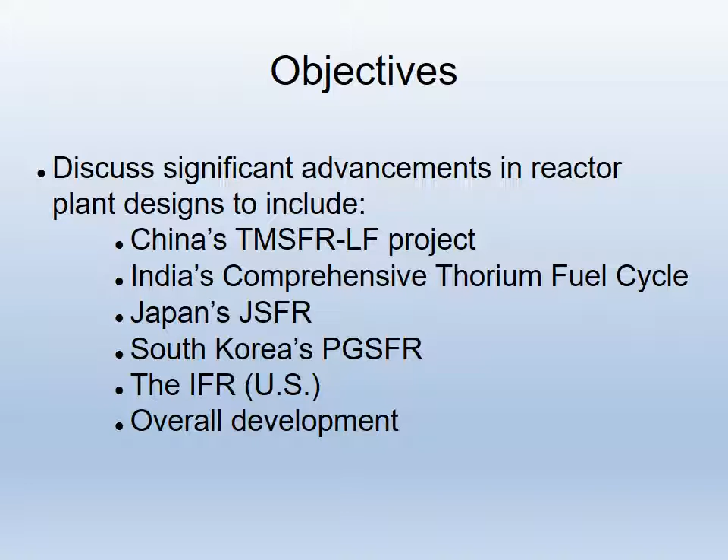Additionally, we will discuss high-level waste concerns, which will include storage, disposal, and vitrification. And finally, we will summarize an outlook on the nuclear power industry in Asia.

The most notable references I have used to develop my capstone project came from the World Nuclear Association and many subordinate web pages, and the International Atomic Energy Agency's Power Reactor Information site. Additionally, my training as a nuclear operator in the United States Navy and the continued education have provided me insight to the nuclear power industry and development of nuclear reactors. There are many more sources that were vital to complete my capstone project and support evidence I discovered.

First, power reactors in Asia. Below is a graph that has been compiled from data from the International Atomic Energy Agency Power Reactor Information System website. Asia currently has 135 operating nuclear reactors throughout the continent. Many of these reactors are light water pressurized water reactors. China and India currently dominate the industry, with China having the significant lead. They take this lead with the number of reactors that have been planned and proposed.

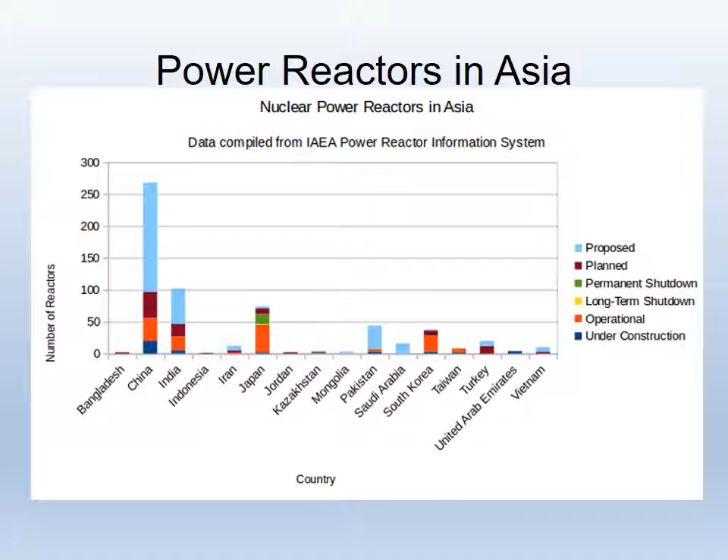The nuclear share. The data below has been provided by the World Nuclear Association, and it has covered the period from 2004 to 2014 of nuclear share production. Nuclear share is a percentage of electrical power production which is derived from nuclear power. Overall, there has been a decrease in nuclear share throughout Asia, and that would be to exclude Japan from this figure. The sharp drop from Japan is due to a shutdown of all plants after the Fukushima incident, and its nuclear share percentage is only incidental of that.

Even though the nuclear share has been declining in Asia, it may not necessarily mean that nuclear power plants are not being constructed. Simply, it means nuclear power plants are not being constructed or contributing to electrical power production at a rate that would counteract the increase in electrical power consumption. Currently, electrical power consumption in developing countries such as China and India is growing more and more every day, and reactor plants cannot be built fast enough at a realistic scale to combat the rising consumption needs of electrical power.

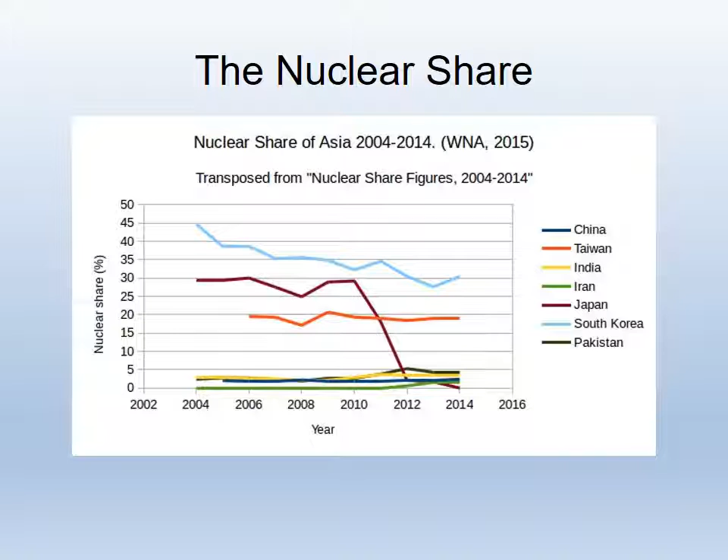Although the nuclear share throughout Asia continues to go down, world electrical power consumption continues to go up, particularly throughout Asia and developing countries. Below is a graph by the Energy Information Administration, which shows predicted power generation rates until the year 2040. The world nuclear share is predicted to slightly go up and slightly plateau by the year 2040. But this does not mean that the building and construction of nuclear plants has been stalled. This is simply because the rate of electrical power production and consumption is going up faster than the nuclear industry is building their share of reactors for electrical power production.

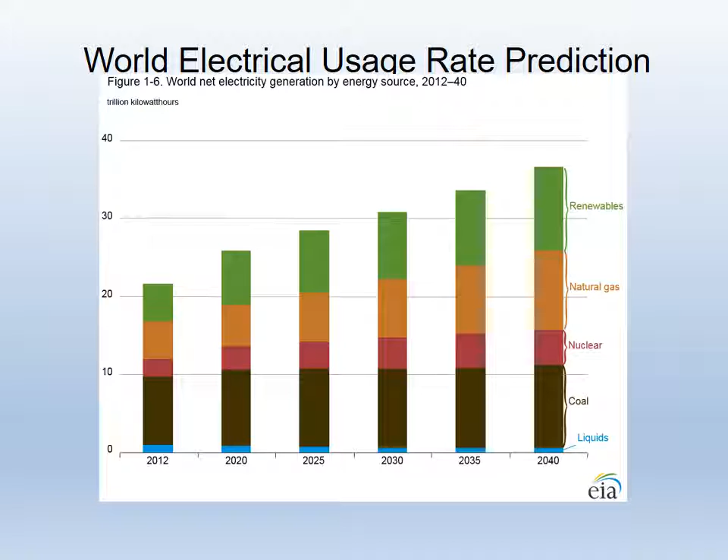Some documents, such as the BP Energy Outlook 2016, have predicted nuclear share rates of Chinese, Japanese, and Korean nuclear power industries to as much as triple by the year 2060. This is a clear indicator that Asian countries have a vested stake in their nuclear power industry over the next several decades and are truly becoming world leaders. Recently, the Japanese nuclear power industry has come to be known and defined by the events of the Fukushima accident.

The Fukushima accident led to the destruction of several reactors and a complete shutdown of the Japanese nuclear power industry. Only several reactors have restarted since the Fukushima accident in Japan, and recovery efforts are still in progress.

China is known to have no incidents above a level 3. The South Korean nuclear power industry has an impeccable record. Recently, the South Korean nuclear power industry had discovered several uncertified parts had been installed in some reactor plants. These reactors were shut down, officials were indicted, and charges were filed against them. No other notable incidents or accidents are known to have occurred in Asia. This excludes Russia.

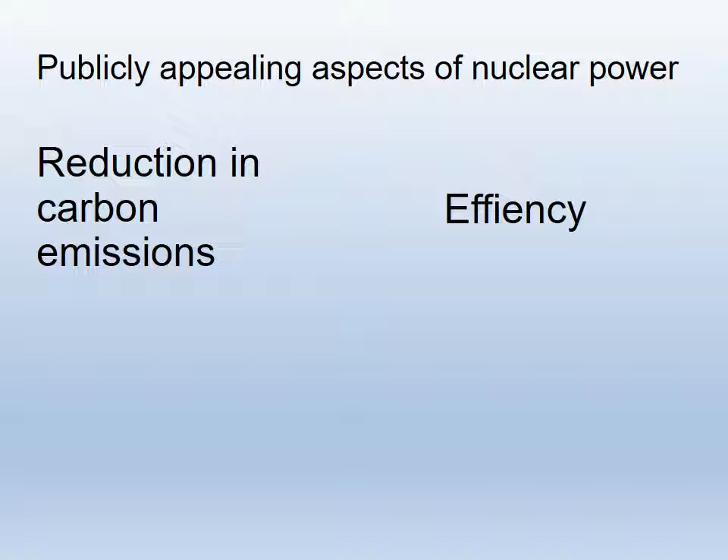Nuclear power has several publicly appealing aspects. However, we will discuss two. The first publicly appealing aspect is reduction in carbon emissions. The second is the efficiency of nuclear power. Reduction in carbon emissions is very appealing to the public due to many political factors and environmental factors, and efficiency stands for itself.

Carbon emissions. According to the World Nuclear Association, nuclear power ranks amongst the lowest of CO2 producing power sources. Nuclear power may even be the lowest ranked CO2 producing power source according to some estimates. Many groups are concerned about carbon emissions due to environmental factors, and many scientific theories support that reduced carbon emissions can improve the environment. These scientific theories have gained much political support and support from the public. Nuclear power provides an alternative to many hydrocarbon power sources, while reducing CO2 production and operating at the same capacity.

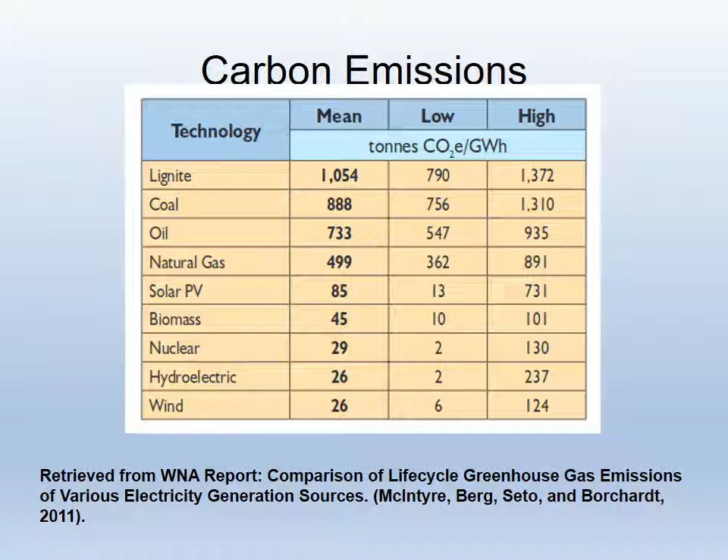Energy return on investment. Energy return on investment is a unique way to give an overall industry evaluation on efficiency based on many factors, such as resources input, capacity factor, initial investment, and many others. According to the World Nuclear Association, nuclear power ranks as the highest electrical power production source as far as energy return on investment is concerned. This means nuclear power is not only efficient in plant design, but economically efficient in many circumstances.

Efficiency can be measured on many scales, but energy return on investment measures the efficiency on a scale of: is it viable? Nuclear power is 10 times more viable than any other power source that you see here when you compare it to the baseline of breaking even. Clearly, nuclear power is a preferred power source if you were to choose a power source to be economically and commercially efficient.

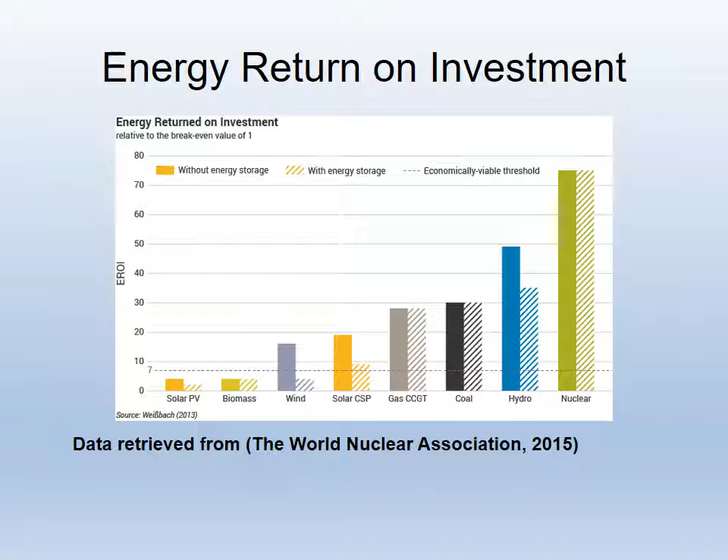Recently, the nuclear power industry has seen many significant advances. In fact, the advances have not stopped. Most of them have been done on paper. However, some countries have put these theoretical plans into action. And some of these are breeding of thorium into a fuel, actinide burning, and molten salt technology.

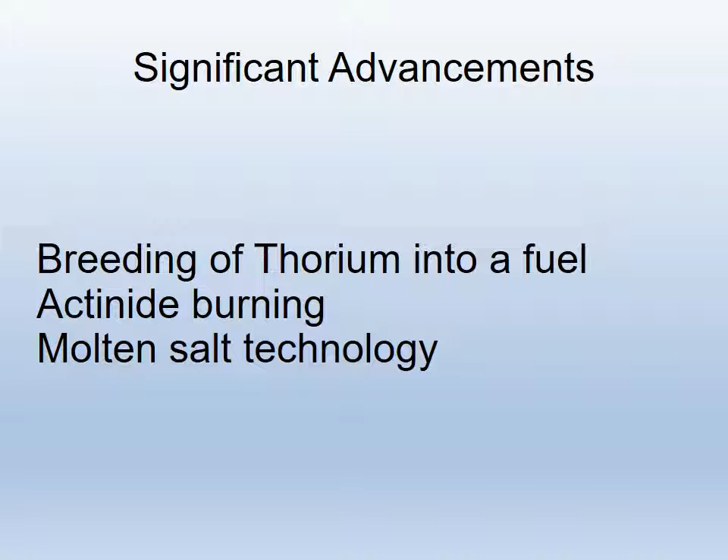Several significant plant designs have been developed throughout Asia due to the desirability of nuclear power: China's liquid-fueled thorium molten salt reactor project, India's comprehensive thorium fuel cycle, Japan's sodium-cooled fast reactor, and South Korea's prototype Generation 4 sodium-cooled fast reactor. Of all these designs, currently none are operational. However, China is near complete in construction of its first thorium molten salt reactor.

This first reactor is to evaluate the use of thorium as a fuel and to evaluate the use of liquid salt as a coolant. The next step in China's thorium molten salt reactor project is to have liquid fuel entrained into salt by being chemically dissolved. This will allow for easy chemical reprocessing of the fuel and continued reactor operations. And the last stage of China's thorium molten salt reactor project is to incorporate a fast neutron spectrum to more efficiently burn actinides and other fission products prior to fuel disposal.

India's comprehensive thorium fuel cycle has also seen advancement in its first stages by producing thorium. This thorium has been produced in pressurized heavy water reactors and is planned to be used for future operations in their entire proposed reactor fleet. India's comprehensive thorium fuel cycle is a large part of responsibility for the proposition of an entire fleet of complementary reactors to develop thorium as their main fuel source.

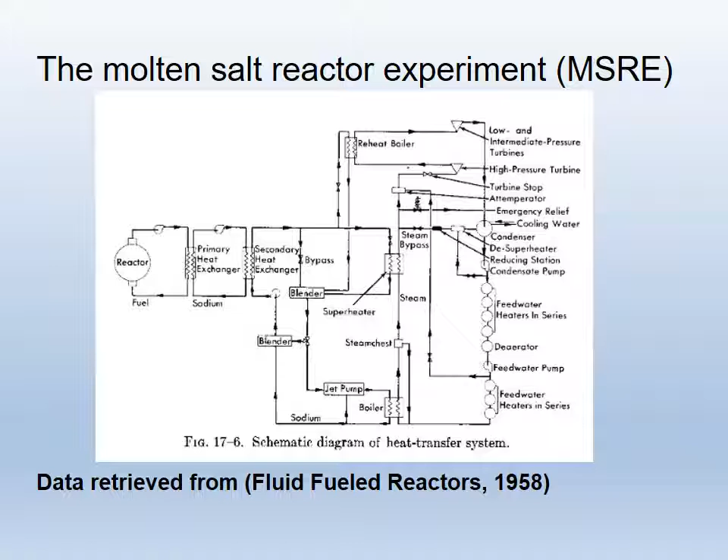The molten salt reactor experiment by the United States was developed to ultimately place a nuclear reactor inside of an aircraft to power it. This reactor was designed to be inherently safe at higher temperatures for better efficiency and lower pressures for a reduction in the number of required safety features. Overall, the molten salt reactor experiment led to a plant which was small, efficient, and safe. Additionally, it provides a fast neutron spectrum which will be beneficial for our next discussion.

This fast neutron spectrum can be very beneficial under correct circumstances. If thorium is used as a fuel and a fast neutron spectrum is maintained, thorium can be bred into uranium-233, essentially turning a non-radioactive and non-fissionable source of material into a fissionable fuel for a reactor plant. This molten salt reactor plant design was proposed by Flibe Energy.

Differences are, the United States molten salt reactor experiment used water in its secondary systems, and the Flibe Energy design of the molten salt reactor plant uses CO2, compressors, and turbines for a supercritical cycle. Additionally, improved safety features such as a drain tank have been installed to this design. This drain tank provides a shaped source for fuel to drain into to ensure no inadvertent criticality can take place.

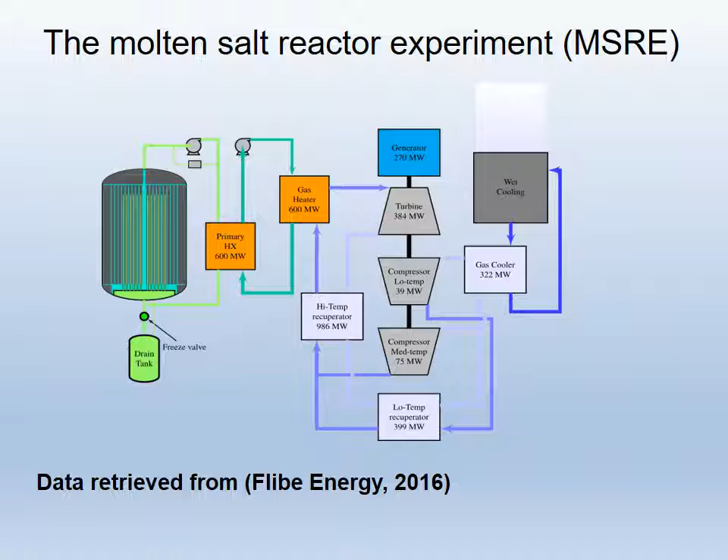Overall, both the molten salt reactor experiment plant design and this reactor plant design by Flibe Energy are the closest indicators of what China's liquid-fueled thorium molten salt reactor plant may look like. This plant provides many advantages over conventional nuclear power plants.

For many decades, nuclear power plants have been producing waste. The majority of this waste is in high-level nuclear waste. This high-level nuclear waste is spent fuel, which contains fission products, and unused radioactive sourced fuel. This fuel is highly radioactive and highly dangerous. It requires the most safe disposal method accomplishable. Currently, fuel is stored on-site in cooling pools at nearly every nuclear site throughout the world and in Asia. This has led to a buildup of nuclear waste.

Currently, the final solution for disposal of nuclear waste is deep underground storage and geological repositories. Waste disposal sites are limited, and when constructed, they must be proven to be impenetrable to groundwater, corrosion, and many other factors to ensure protection of and isolation of the nuclear waste for hundreds of thousands of years. Currently, nuclear waste from conventional reactors will take hundreds of thousands of years to decay. Two factors may make this waste more safe to handle after use: use of fast reactors to burn actinides off, and vitrifying this waste will prevent spread of its effects.

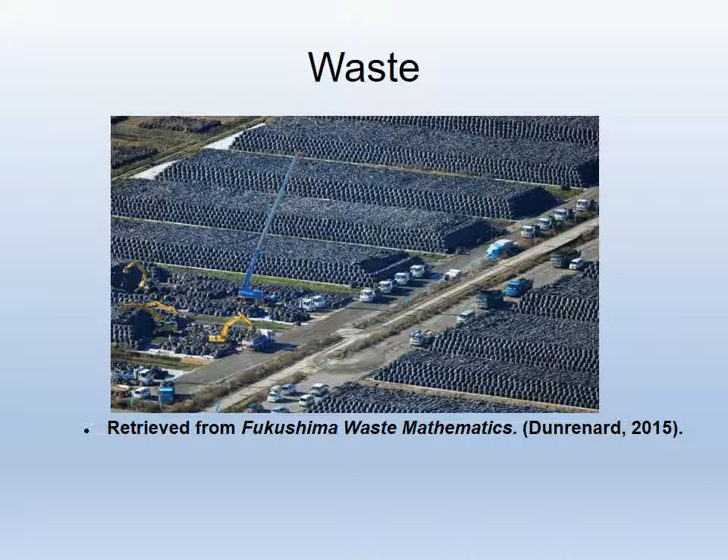Vitrification. Vitrification is a process of turning a substance into a ceramic or a glass. Ceramics and glass are known for their low chemical reactivity, making them ideal candidates for spent nuclear fuel storage. Additionally, ceramics and glass undergo less erosion under harsh conditions as compared to other storage methods. Ultimately, any vitrified substance is going to interact very little with the outside environment, especially in the center of that substance.

This makes vitrification a very attractive way to dispose of spent nuclear fuel by ensuring low chemical reactivity, high mechanical stability, and little effects if mechanically disturbed. Currently, long-term plans throughout Asia are deep geological repositories which store vitrified nuclear waste for the ultimate way to dispose of spent fuel.

In summary, Asia has a large fraction of nuclear power plants operating throughout the world. Many more are under construction, planned, proposed, or awaiting restart. These nuclear power plants significantly contribute to the nuclear share throughout Asia. Although nuclear shares may be declining in many cases, total energy production by nuclear power is going up, while electrical consumption percentage is going up as well. This will ensure nuclear power remains a significant and relevant source for electricity throughout the next several decades.